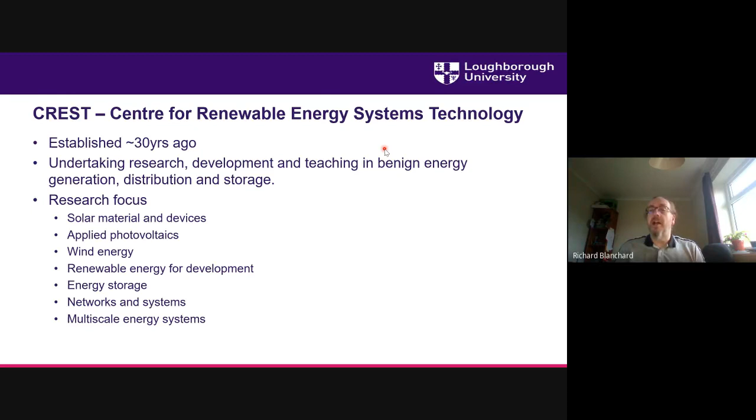And these are our research topics: solar materials, applied photovoltaics, wind energy, renewable energy for development, which is my area of interest, energy storage, which I'm also interested in, networks, and then multi-scale energy systems.

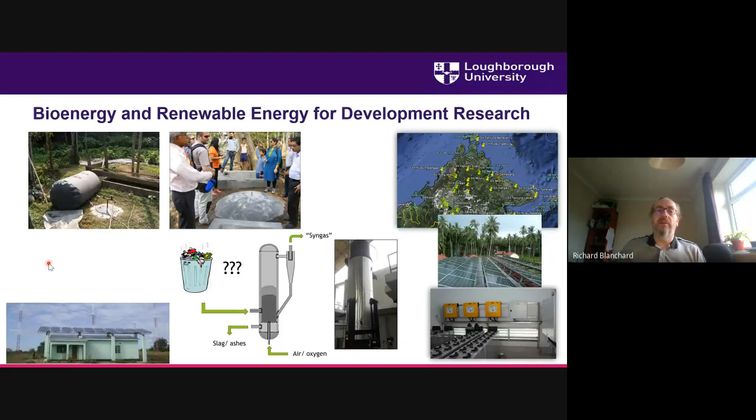Okay, so let's get back to the topic now, and the motivation behind why it's important to look at waste. In terms of a bioenergy resource, it's material which has got energy value within it, and the reasons why we need to treat this. Obviously, there's more people. We have a growing population. General trends are that people are getting better off. More people are wanting to buy more stuff and use more stuff, and therefore we have large amounts of waste, and we expect that waste to increase to large amounts around the world.

So this is the reason. The waste has to be treated somehow. And I'm sure you're aware of some environmental problems of water contamination, land contamination, and the oceans filling up with plastics.

And so these are some of the motivations. So we've got that, and we've also got to deal with issues around global warming and other environmental problems. So the challenge really is how do we treat and manage this waste.

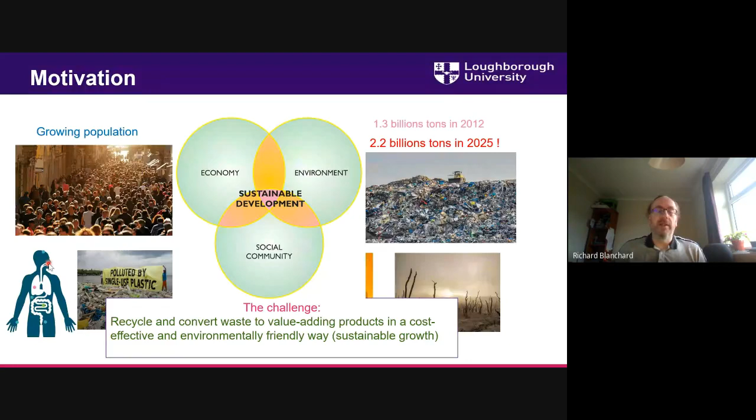Of course, there are lots of different options here. You can look to produce recycled materials, actually recycle wastes, or you can convert it to energy. So there's lots of different routes which could be taken. We should ultimately try to recover materials as best as we can and reuse them, but we can't do that for everything. So this talk today is about how we manage the waste and how we can get the most benefits from it.

Municipal solid waste is basically everything we throw away, and in the UK we throw roughly about half a ton of waste per person away. It varies around the world - in some parts it's much higher, in other parts much lower. But the trend is as countries develop, more waste gets produced, and we have to deal with it. It's made up of lots of different materials.

Some of these materials are useful from an energy perspective. For others, it'd be much better to recover the waste itself. So if you can recover electronic wastes, metals, glass, and plastics, we can recycle them. But then there's the organic matter, which we could convert into energy. Actually, plastics do have a high energy content as well, although once burnt, that's the end of their usefulness for recycling.

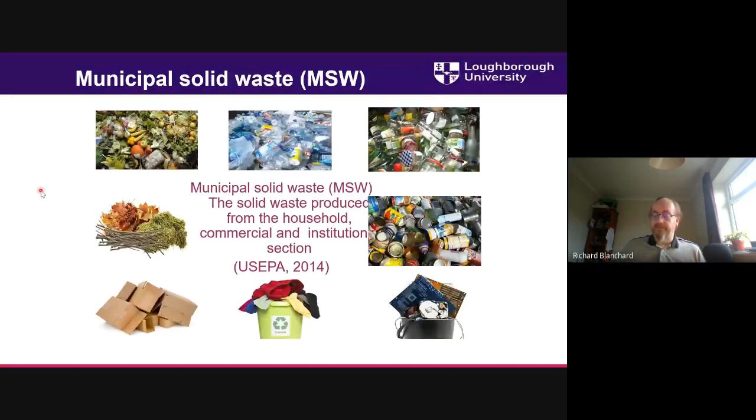So I'm going to look today at processes which are already technology ready - processes which could actually be used. I'm not talking about things which might happen in the future. These are processes which are already at demonstration stage, or also already at commercial stage.

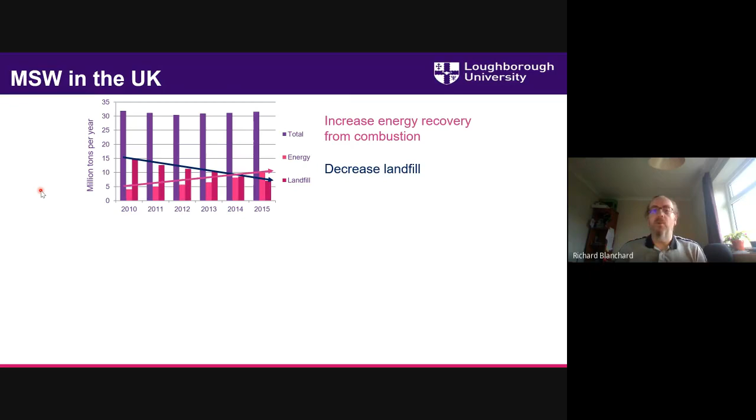And the trend has been that we're actually already starting to produce energy from this - we're converting roughly one third of this waste to energy already. We're also at the same time reducing the amount going into landfill, and it's a requirement that we can't put waste into landfill anymore because of the methane issues associated with uncontrolled landfill.

That trend is going to continue, and we should be getting to a point where we have an ultimate objective - when we were part of the European Union, I hope it still will carry on - that we will reduce our landfill to zero. But it's getting more challenging to deal with waste in this way, because people are concerned about energy-from-waste systems, and whether they lock you into producing waste.

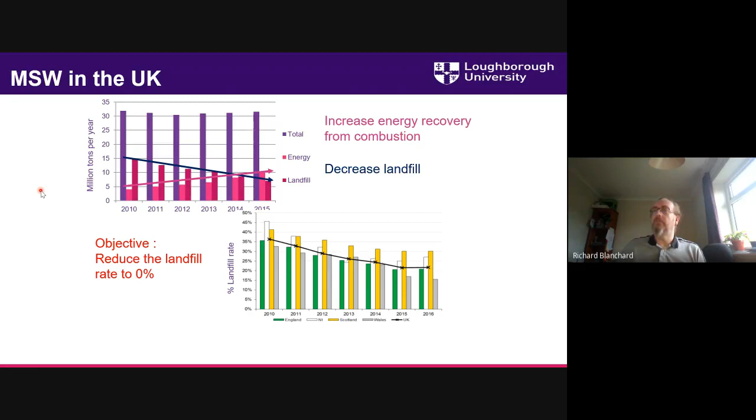Around Europe, converting municipal solid waste to energy is quite a major activity, particularly in the more developed countries. For example, in the UK we've got about 41 plants converting waste to energy. In France, they've got 126 plants. Germany, 121 plants. Italy, 40 plants.

Sweden, 33 plants - and bear in mind that Sweden's got quite a low population compared to the UK. It's really converting nearly 80% of its waste in Sweden now goes to energy.

So you can see these are mature technologies, but the most mature ones operating tend to be basically incineration plants. We call them energy from waste, or energy recovery facilities, to hide the fact that they are largely incinerators which do combustion. But as I say, there are other routes which could be taken, and technologically they're developed, but it more comes down to the economics - are they economically mature technologies?

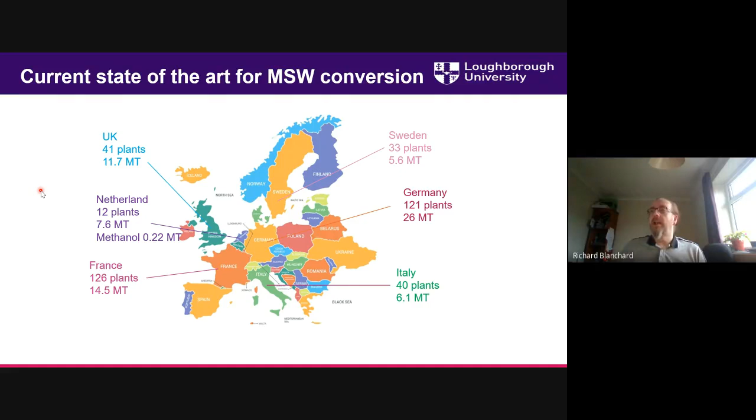The Netherlands as well - again, a small country, but converting quite a lot of its waste to energy. So the objective of this talk is to compare different technologies to valorize and convert municipal solid waste, using a systematic life cycle assessment approach.

This is the thing which people go to as the route for treating waste. It's because it's the least complicated, and in terms of off-the-shelf systems it's the cheapest option, and it produces electricity. So basically, you have municipal solid waste, you combust it, you produce steam, and then make electricity. That's the simple approach.

The second closest to commercial routes is gasification. Here you're producing gas, and then that gas gets combusted for heat, steam, and electricity. The advantage with gasification is that you can store that gas until you want to use it, which has advantages in terms of generation, because with combustion you have to use that electricity instantaneously as it's being burnt.

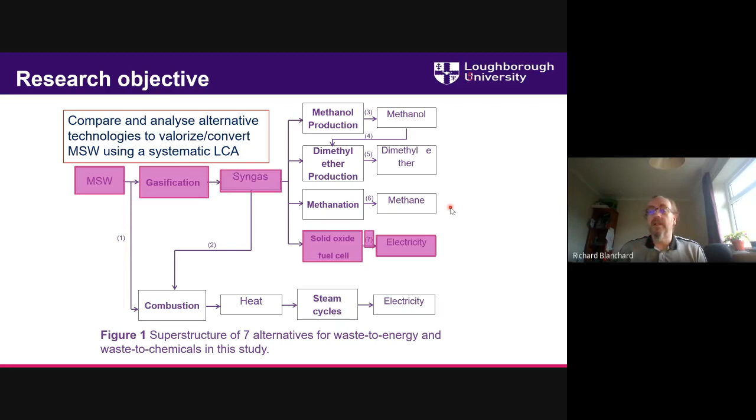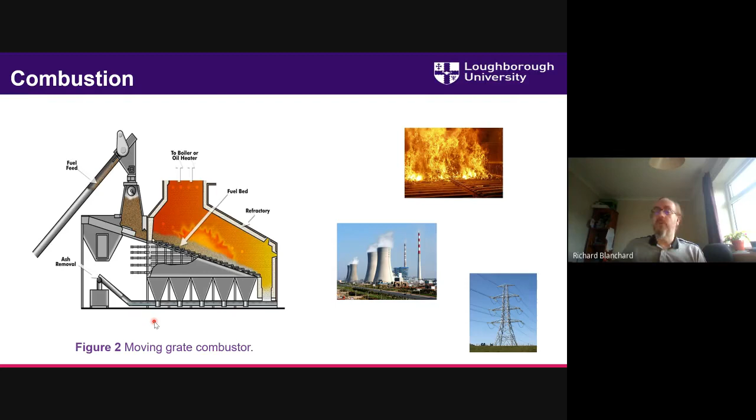We call this the slag material, and this could be material you could actually recover metals from, giving it some economic value. The material can also be used as aggregates for building materials. So that's the basic process - just a couple of pictures here to illustrate what goes on. The principal output from this is electricity, and that's what we're looking at in this process.

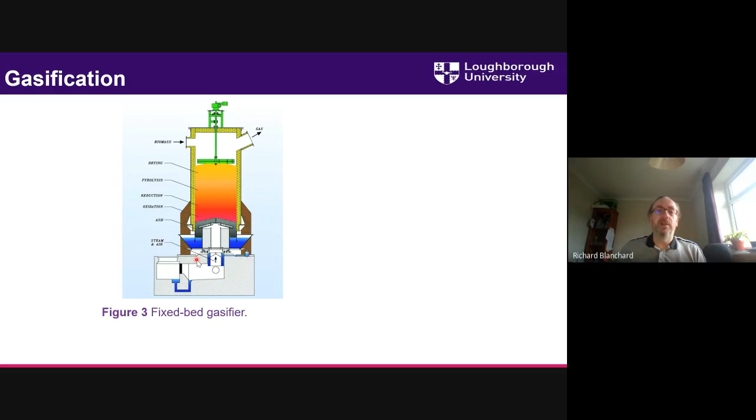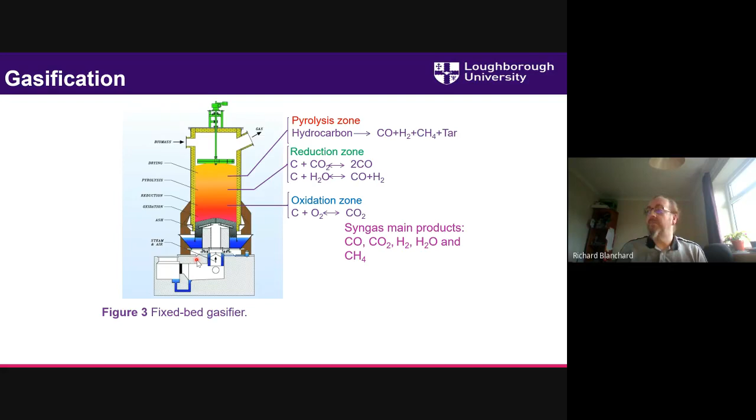The driving reason for this is to produce gas, which can then be used at different times. There are lots of different chemical reactions taking place in the different zones - we're producing carbon monoxide, carbon dioxide, hydrogen, water, and methane in varying amounts. That's the reason to produce the gas.

From this gas, we can then generate electricity, potentially at a time when we want to make use of it. We can also get some residues as well, which we can then utilize for the future for other purposes - recover materials, or maybe make this waste into building materials as well.

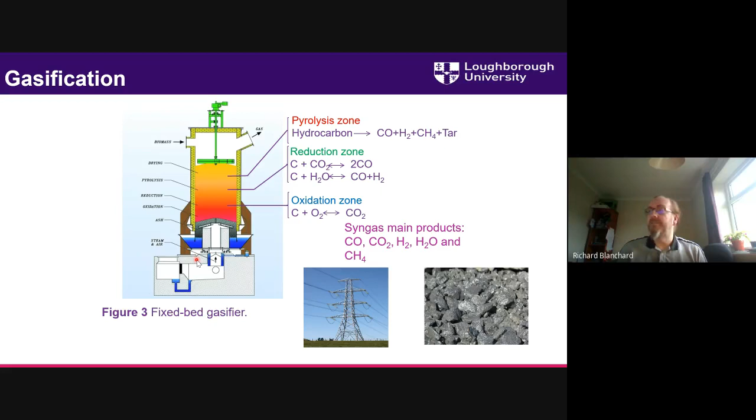At this point I want to talk a little bit about one gasification plant I visited a couple of years ago, in Assam, to show more about the process. This is where I visited one of my former students. They make about 80 tons of biscuits per day at this factory.

This is in Assam state. I want to illustrate the gasification process in more detail, because all the other technologies we're going to be talking about rely on syngas, which comes from gasification. So all the other five processes plus gasification rely on gasification itself. That's why I wanted to spend a few minutes looking in more detail at it.

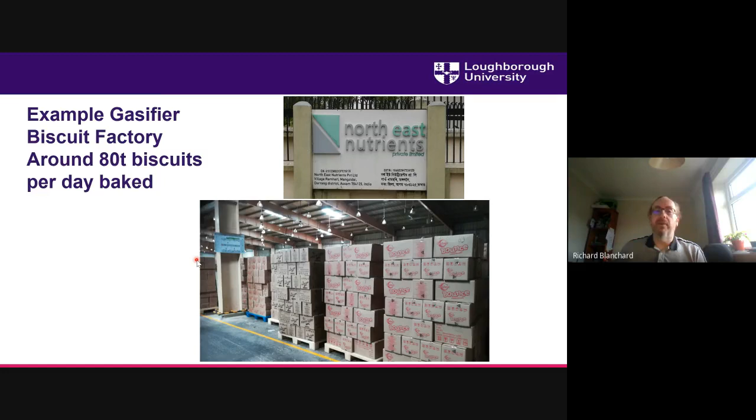This is a very interesting facility because you've got this biscuit factory, and the heat for making the biscuits is actually being derived from biomass rather than waste. They get bamboo from local farmers, using a local agent to collect it. It then gets fed into this stockpile, hauled up on a lift into the top of the gasifier — these are the gasifiers here.

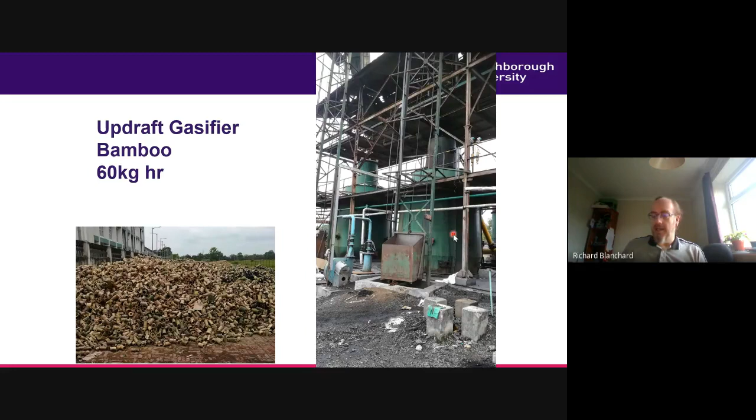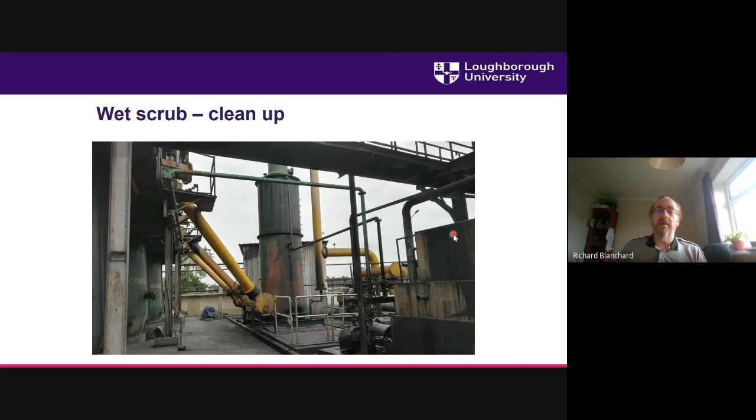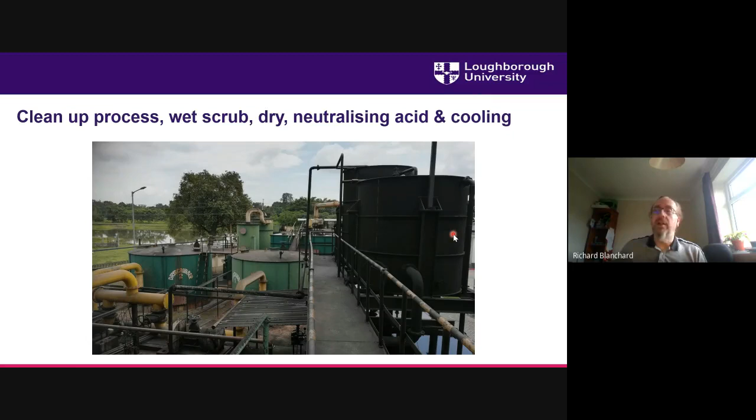After the gasification process, you go through a whole range of cleanup processes. There's scrubbing of the gas to get rid of particulates and acidic compounds, to neutralize those that may be produced, and also cooling stages. So you've got dry scrubbing, wet scrubbing, acid neutralizing with activated carbon, all to ensure good quality gas coming into the factory, since it's a food processing facility. The effluent water from the process is also cleaned up.

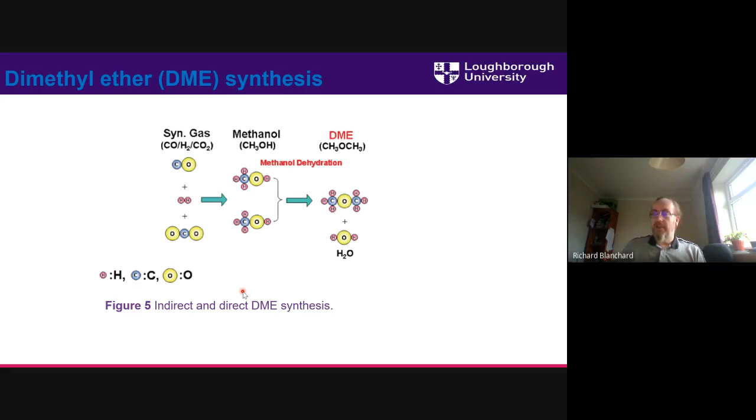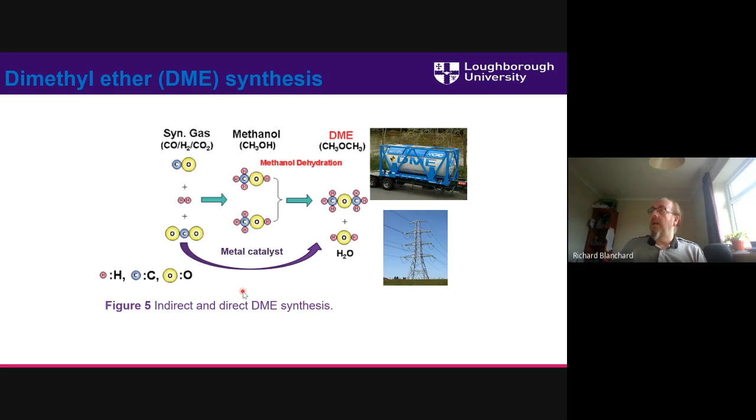Then there's dimethyl ether, which is our diesel substitute or chemical processing compound. Again, we take in the gases to produce methanol, which then gets further converted to dimethyl ether through the use of metal catalysts, producing a fuel and also electricity. I'll talk more about the volumes when I move on to the life cycle assessment stage.

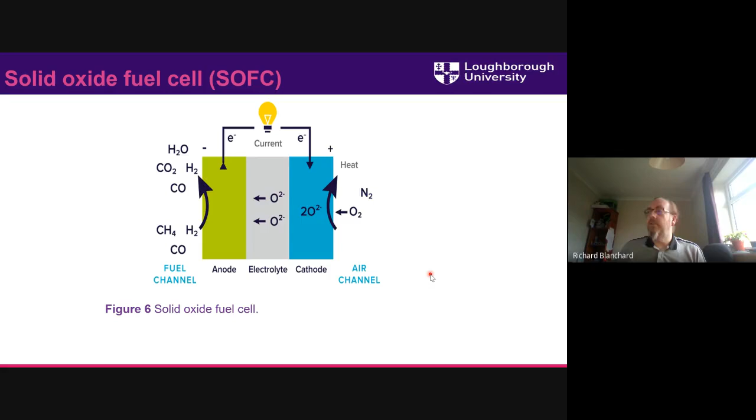Then we've got our solid oxide fuel cell route, where we take the syngas compounds — carbon monoxide, methane, and hydrogen — and they react with oxygen through the fuel cell, giving water, some carbon dioxide, and unreacted hydrogen and carbon monoxide, generating electricity. The primary product here is also electricity, but it's electricity that could be generated when you need it, if you've stored your gas. An advantage of using fuel cells to generate electricity rather than just burning the gas is that you're not wasting heat — you're not really generating heat, and you get more electricity produced.

And then methanation, I think this is the last one. Here we're taking our syngas and going through a reaction process with catalysts, and we produce methane as part of this. So if you want pure methane, it could then be used in gas engines as well. Again, my purpose is not really to explain a lot of detail about the chemical processes.

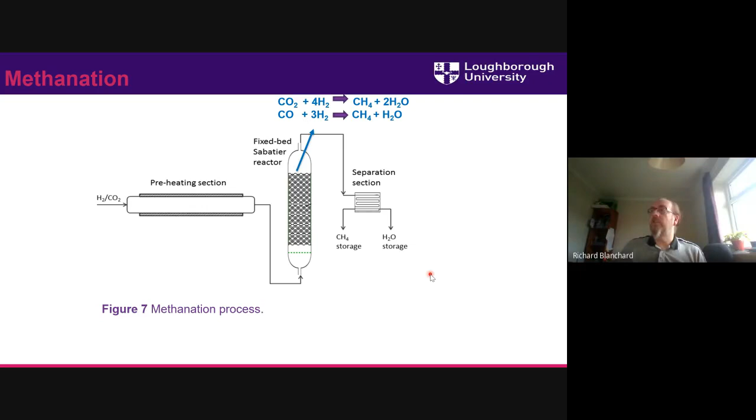It's more about how we compare these processes from the life cycle assessment approach. So again, these are our reactions to produce methane: carbon dioxide given with hydrogen gives methane and water. Those are our products.

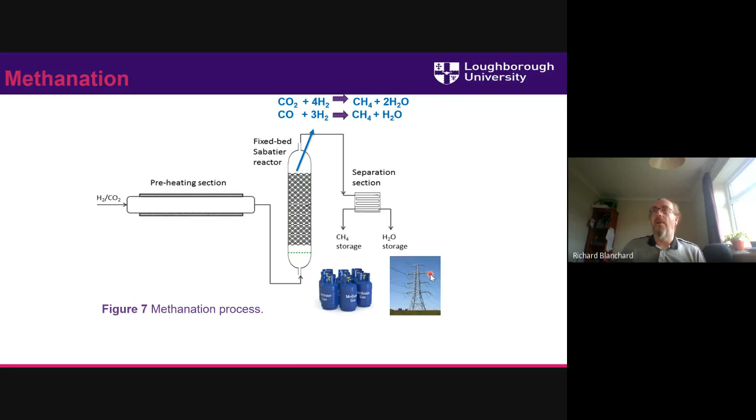So let's look now at some of the methods for the life cycle assessment approaches. Life cycle assessment is a means of trying to look at industrial processes. It's not about planning or building systems, it's actually looking at processes which are operating. The idea is to think about, if you're a company, how can you improve your processes, and also why would you want to improve your processes?

Well, it comes down to resource efficiency. We are in a finite world. There are only so many resources available to us, and we shouldn't be wasting them. If we can reduce our waste from an industrial perspective, hopefully that will mean you reduce your costs in terms of materials used. By doing that, your profits will improve. And if you're a big company, that makes your shareholders very happy. It also allows you to give yourself a badge.

And this is ISO 14040. You can actually have your processes assured and approved through the ISO 14040 process route for life cycle assessment. You can think of this as a really good way of getting industry to really think about what their impacts are and how they can improve their industrial activities and reduce their environmental footprint.

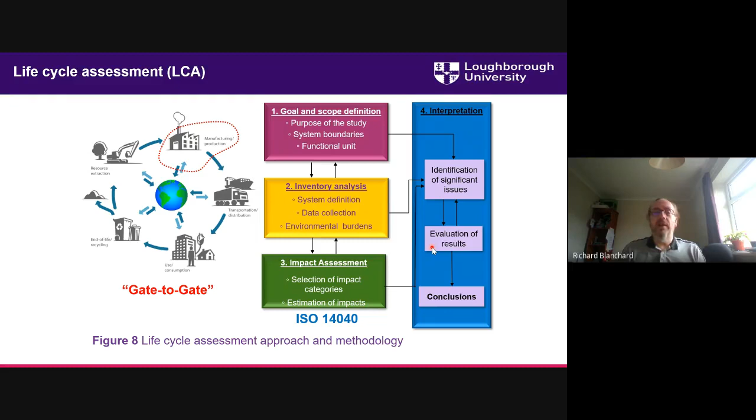And then you come to conclusions about what is it you're going to do. So that's very much a summary of the life cycle assessment process. And so we'll look a little more detail about this.

So I'm taking UK waste composition as an example here. This is a sort of the nature of a typical UK waste. It varies depending on where you are in the country. Depends on, for example, if you're in a very affluent part of the country, you might find you're producing more waste than from areas which are more deprived.

It also varies seasonally as well. So at different times of the year, waste changes. Our diet changes. For example, we eat more salad in the summer in Britain. We tend to eat heavy foods, lots of carbohydrates in the winter. So the mixture of foods and materials also changes, and particularly at certain times of year, you get a lot of waste at Christmas.

So you find that the waste will vary, and it varies around the world. If I did this in a different country, you might find, say for example, when we were doing work in Ecuador, that the organic makeup was about 70% of the waste, because there's less plastic and also, I suppose, less developed, and therefore less material has been thrown away. So it very much varies around the world.

You might find in India you'd have a different mix. If we did this research in India, we might find we have a different mix of organic wastes in our waste streams.

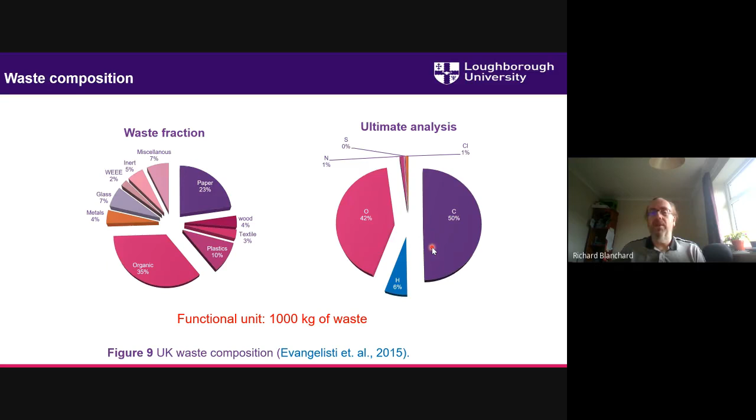So again, these figures come from literature. They also come from the modelling work which was undertaken to produce this. So these figures have been validated against other literature. And we also then have materials to do with the treatment of this waste. So again, thinking about the gasification slides I showed, we've got to do air pollution control. So to neutralize compounds such as acidic compounds, we use lime. And if we get things such as dioxins and furans being produced, activated carbon to capture those. So ultimately what goes up the flue gas will be nitrogen, carbon dioxide, water, maybe a little bit of oxygen being released. So we're getting from this process about 428 kilowatt hours of electricity.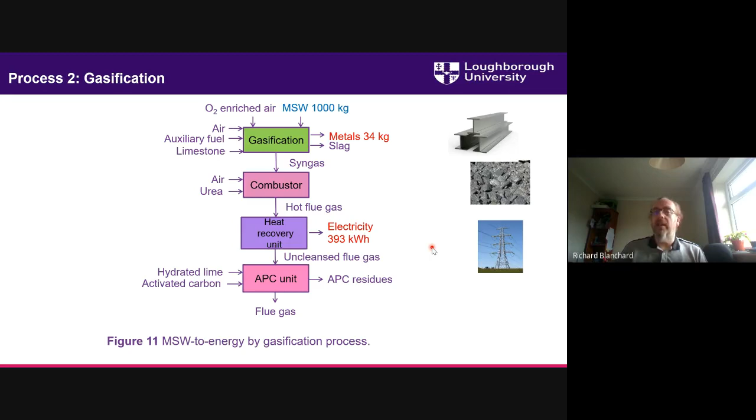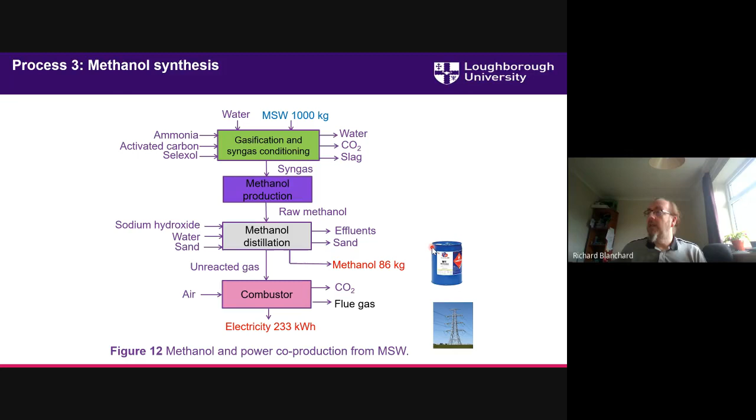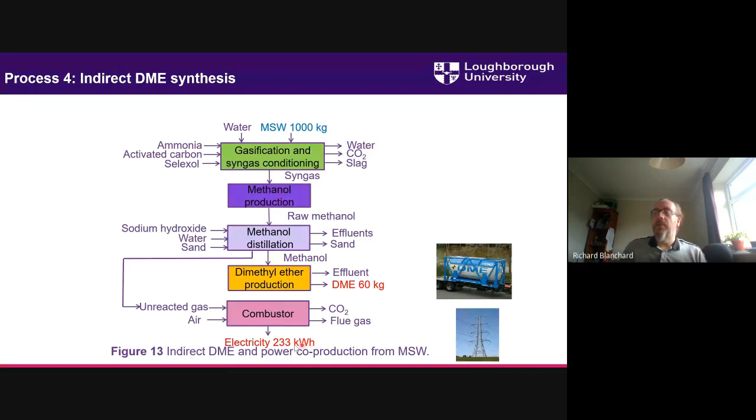We've then got the indirect dimethyl ether synthesis process. Again, we can see we've got the treatment here of the gas. We're making methanol here, treating this, and then from the methanol we make our dimethyl ether. So we're producing about 60 kilograms of this, but the unreacted gas is the same. So again, we're able to produce about 230 kilowatt hours of electricity.

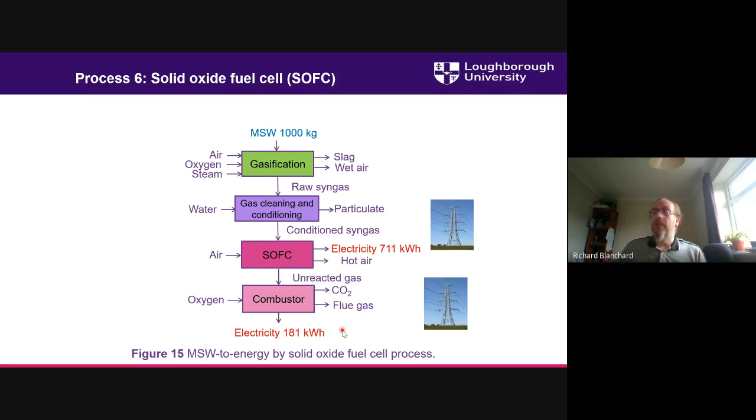Then with the solid oxide fuel cells, again the gas from gasification doesn't need so much cleaning up as the methanol and dimethyl ether processing. We then get conditioned syngas, which produces 711 kilowatt hours of electricity, so we're producing more electricity, we don't have thermal losses. And then its unreacted gases can go into a more conventional steam generation route, which could also give us another 181 kilowatt hours of electricity. So we can produce a lot of electricity through the solid oxide fuel cell route.

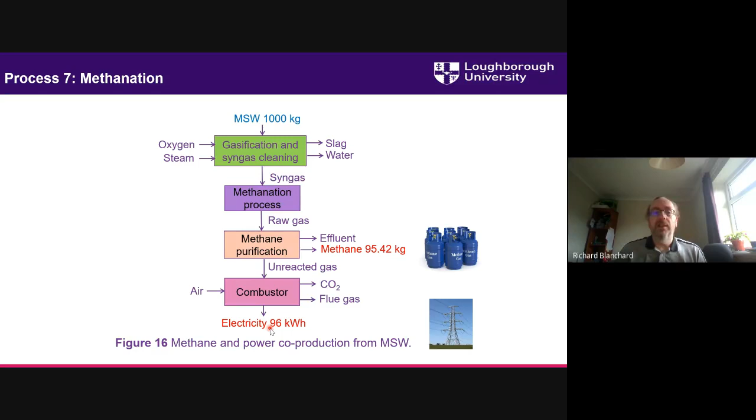And then finally, the methanation process, and this again goes through cleanup, yields us pure methane gas, which can go off to bottled gas, and produces some electricity as well. So those are the main processes, very briefly. And so now we'll consider what we do in terms of impact assessment.

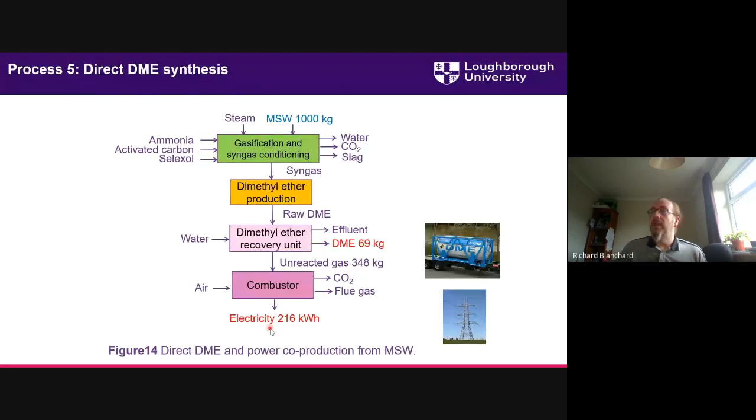Okay, so what you would do is once you've got what we call our life cycle inventory. This is our life cycle inventory of inputs and outputs. This is what we're looking for here. What we would do is take our life cycle inventory results, take the numbers, and then use a methodology called Impact 2002, which enables us to look at what the effects are going to be at different stages. So rather than seeing what the overall effect is, it allows us to say, well, what are the effects going to be in different aspects of impact on people, society, the environment, the climate, and then resources.

So it allows us to then think about these compounds: are any of these carcinogenic? Are they going to affect people's cancer? Are they going to affect respiratory health? For the inorganic compounds, are any of these radioactive? Will any of them cause ozone depletion, which could then lead to more ultraviolet radiation, and that affects our health

as well? We can also look at the effects on the water environment, so in terms of aquatic chemical pollution, terrestrial pollution, the effects of nutrients on land and water, land area, and also whether we are going to acidify the water or cause eutrophication, so actually causing enrichment of the water, global warming, and then the use of non-renewable energy, so fossil fuels, and also what minerals we use.

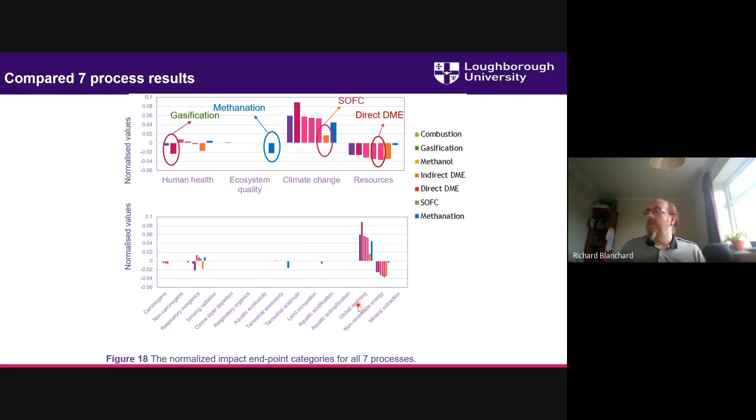But in terms of global warming, we can see that obviously we're going to be producing carbon dioxide and, in some cases, methane, which have high global warming potential. Okay. But the advantage is that we're dealing with waste materials, and in terms of generating electricity from waste, we're actually making use of these wastes to make electricity. We're not having to get new materials, new biomass, or coal or oil to generate the fuels and the electricity. So from a non-renewable energy perspective, all of them do seem to be beneficial from that point of view.

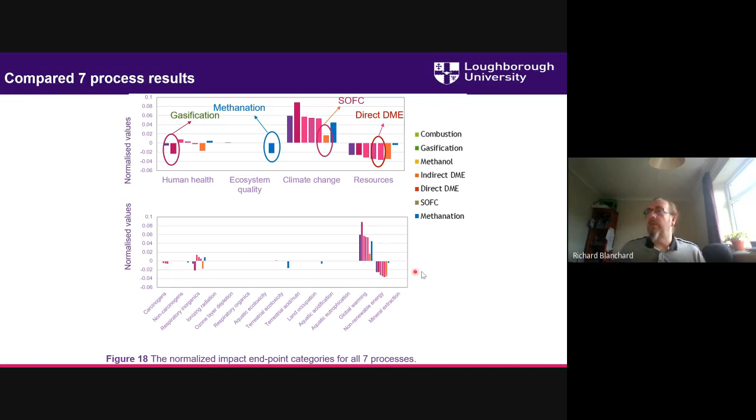But yeah, we're looking at a bit more detail about these now. Okay. So again, apologies for the coloration, but at least I've got some notes here to show you where the effects are. So overall, for combustion results, the emissions are the problem, are the cost. Okay, but we also have some avoided burden as well.

So as you can see, we've got above and below the line here, and so we're actually getting emissions, yes, which are an environmental burden. We're also getting a reducing of some burden by the electricity which they're generating. So that's where the benefit comes for these processes. So actually reducing that, and particularly the resources overall, is a way to reduce environmental burden.

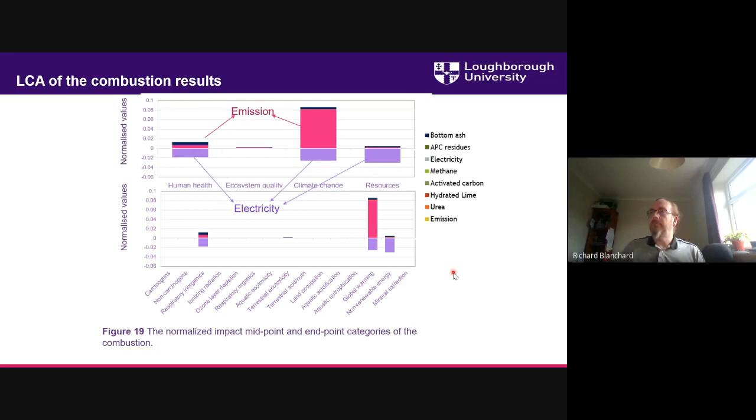For gasification, it's similar. We're getting emissions from the carbon, from the gases, from carbon dioxide, methane, but we're also getting the benefit of electricity as well. This shows a bit more. We can recover some minerals and metals as well.

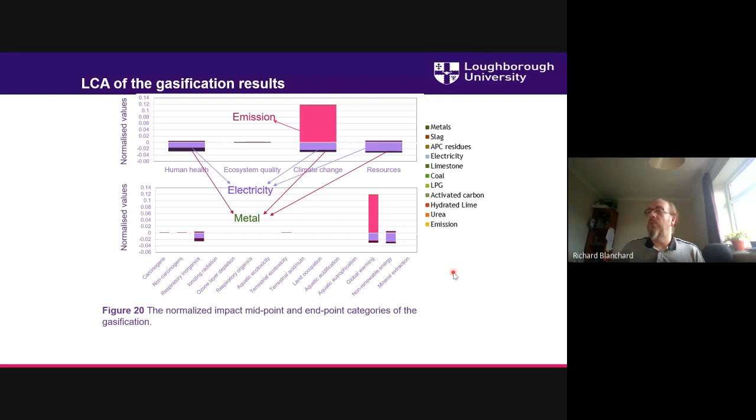For the life cycle assessment of the methanol process, again, it comes down to the emissions being the issue, but we've got benefits of electricity and also benefits by making the methanol which is being required. So we're trying to see what the balances are between the burdens and the benefits of these processes.

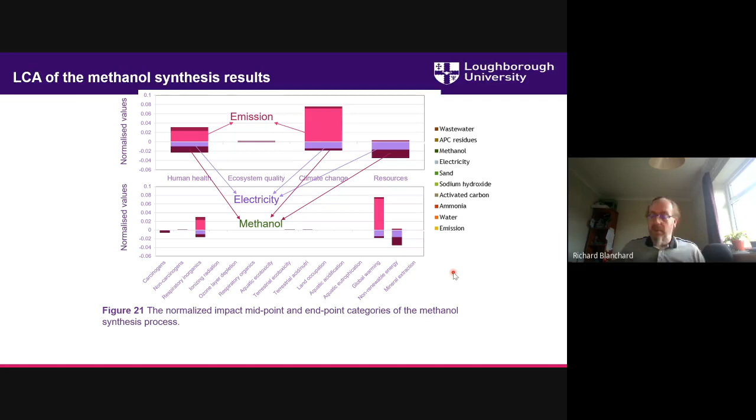And then the methanation process, again, we're getting emissions. We don't generate a lot of electricity here in methanation, but we do produce the gas as well, which is the benefit for this. And again, you can see across the main routes it's a very similar pattern also with the endpoints and the midpoints as well.

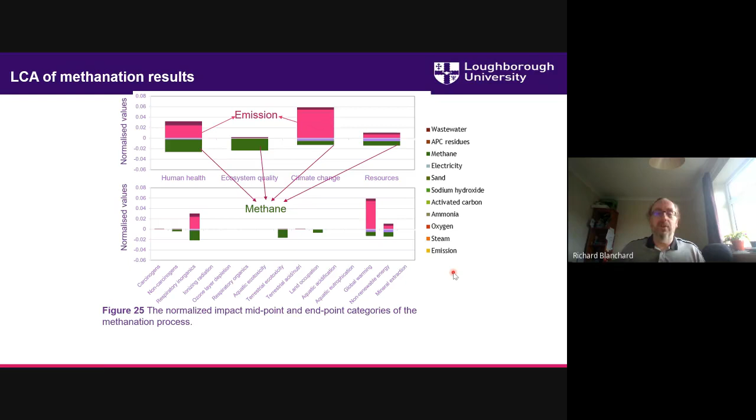We can also see what ranks second. So for gasification, it's good. It's also pretty good in terms of ecosystem quality. But actually, overall, there's not a lot really wrong with the ecosystem quality. There's not a lot of difference between these. Methanation is good for ecosystem and global warming potential, and then for global warming potential and resource, we've got direct DME synthesis and solid oxide fuel cell.

But overall, we can probably see that solid oxide fuel cells seem to rank pretty well across all of the areas, and this would appear to be, from a life cycle assessment point of view, the way to go forwards for treating waste, because you are minimising your global warming potential, and it's also good in terms of its overall effects, low effects on human health and resource consumption as well. And the ecosystem, there's not a lot of difference across all of the areas there, so it doesn't make a lot of difference.

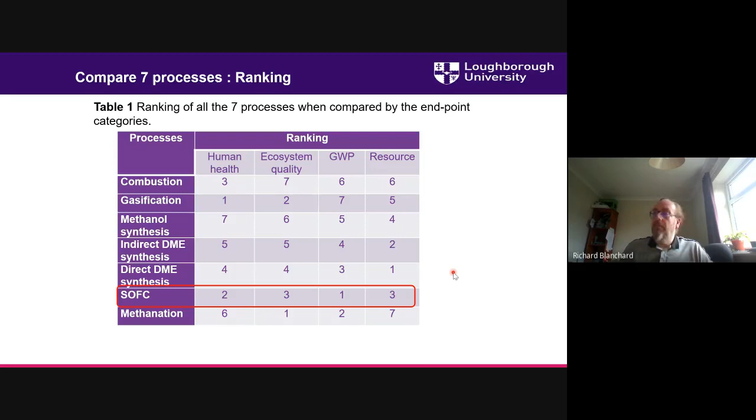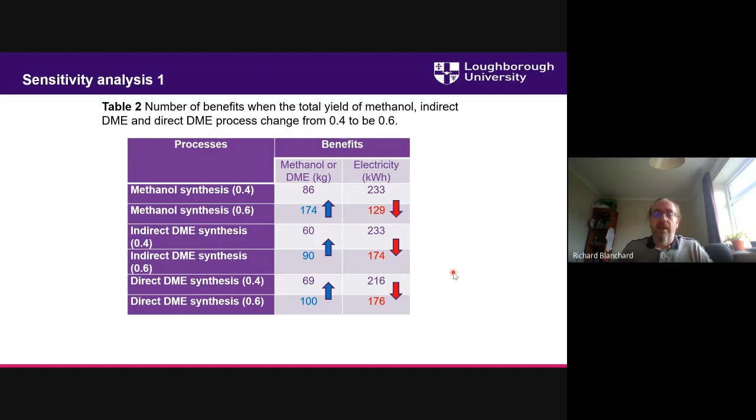Experimentally, we can see that we can improve the yield from about 0.4. In terms of the overall model of methanol production, the yield, the conversion of syngas to methanol and DME, is round about 0.4. So that means about 0.6 is unreacted gas. If we can do this, can we see some increases and changes in yields? If we increase the yield, and an experiment seems to show this is possible, we can produce more methanol and dimethyl ether. In doing so, we reduce the amount of electricity being produced, because we're making more DME and less electricity to increase the methanol DME productivity. Experimentally, this type of thing appears to work.

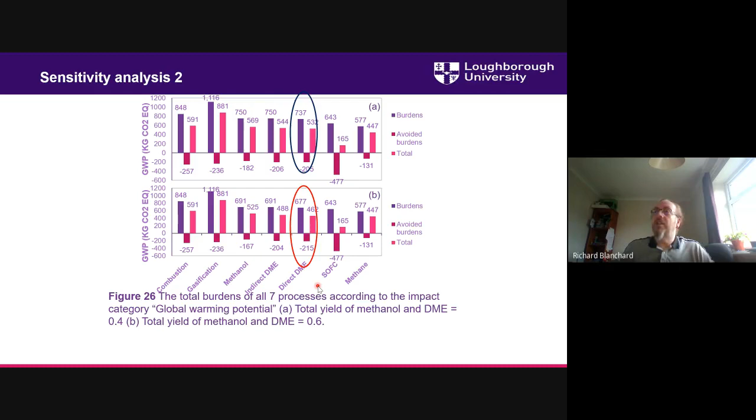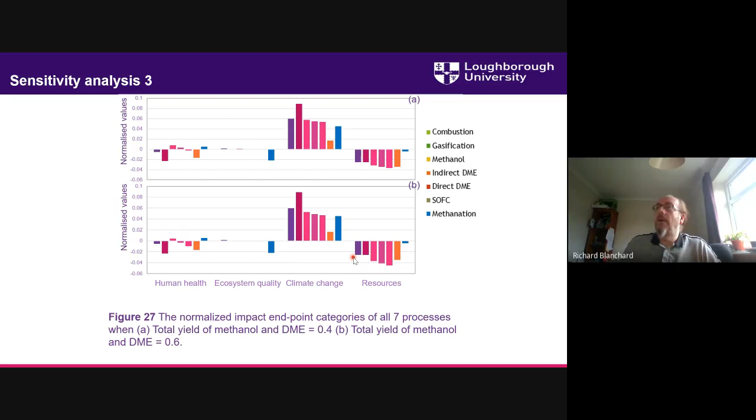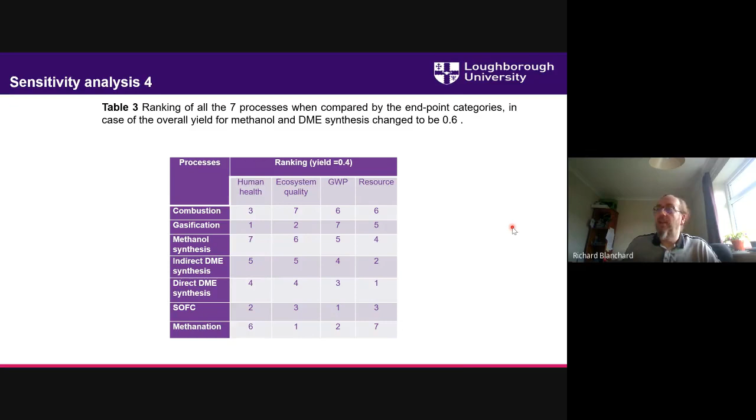So this is where we were ranked previously, this is what we started off with, with the existing yields and the existing ranks of our categories for endpoints. If we then look at the overall effect this has on our life cycle assessment processes, if we increase the yields of methanol and DME, we can see that the direct DME moves up some stages within the processes, and we see some other processes move down, so their ranking is reduced.

So it would appear that if you're able to modify the process, you can actually reduce your overall life cycle impacts, particularly with DME. It doesn't make any difference to the indirect, but it does mean that overall DME would appear to be the best in terms of its overall life cycle assessment, by looking at the sensitivity and changing the yield.

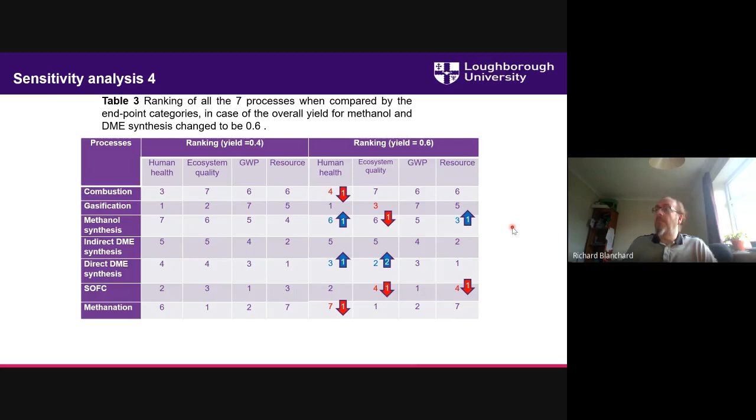Okay, so overall then we're looking at DME appearing to be the best process. Okay, so let's come to some conclusions now.

So this methodology, this life cycle assessment undertaken, looked at different ways of converting municipal solid waste into electricity and chemicals. And it was focusing on those technologies which have got high technology readiness levels, so those which are close to market.

What it shows is that it's a complex process, that you have a whole range of different outputs from this, and depending on what the priorities are, you could potentially come up with different answers for your preferred routes. So there are lots of different objectives here in nature.

So for example, if we're looking at human health, we might think that gasification would be the route to take. Considering ecosystems, maybe it would be the methanation route. For climate change, solid oxide fuel cells. And then if we're looking at resources, there's the direct DME.

But thinking about the charts, there's in some cases not a lot of difference between some of these amounts, particularly in terms of the different methanol and DME processes. And generally, global warming impact is quite similar, apart from gasification and the solid oxide fuel cells. The ranking is helpful, but the difference between the numbers in some cases might be very fine. So whereas you're looking at a difference between like 2, 3, and 4, actually differences may be very small between them.